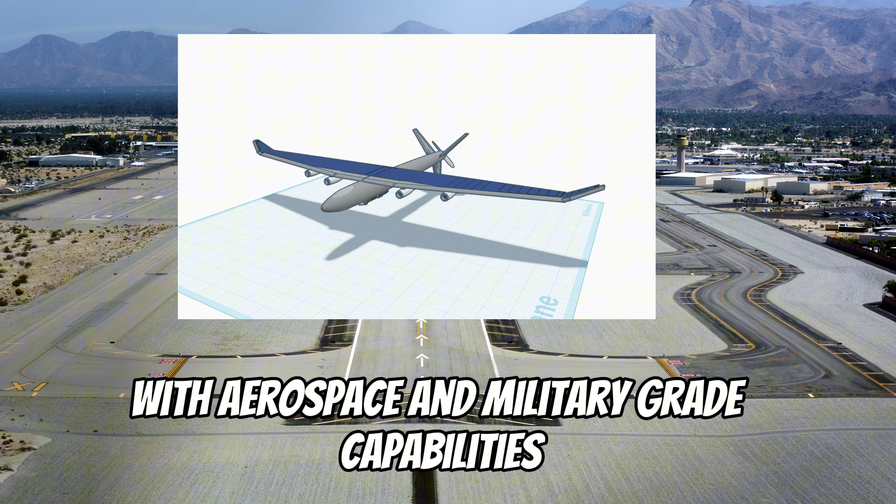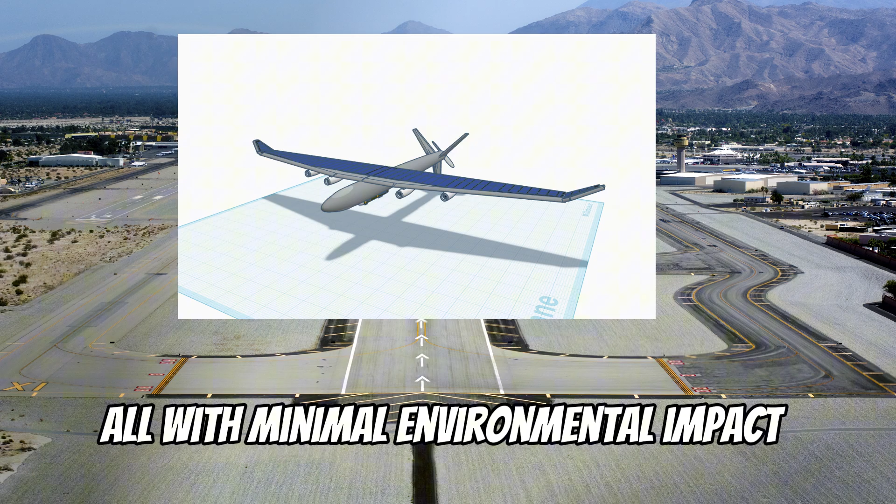It's a glider-style solar-powered UAV designed for long-endurance missions. Combining sustainable energy with aerospace and military-grade capabilities, this unmanned aircraft is built for tactical surveillance, remote operations, and environmental monitoring, all with minimal environmental impact. Let's take a deeper look.

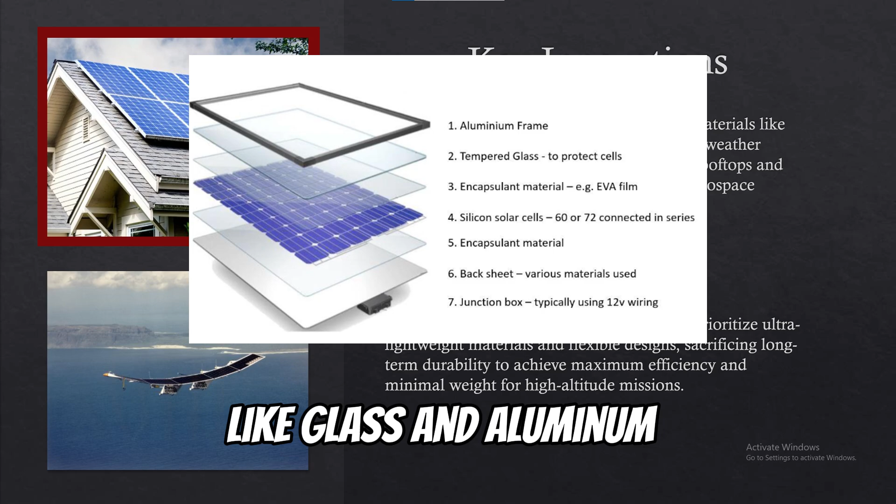Let's start with the key innovations that make our UAV flight-ready. When it comes to traditional solar panels, they rely on heavy, rigid materials like glass and aluminum to withstand years of weather exposure. While this is ideal for rooftops and other stationary setups, it poses a serious limitation for aircraft applications.

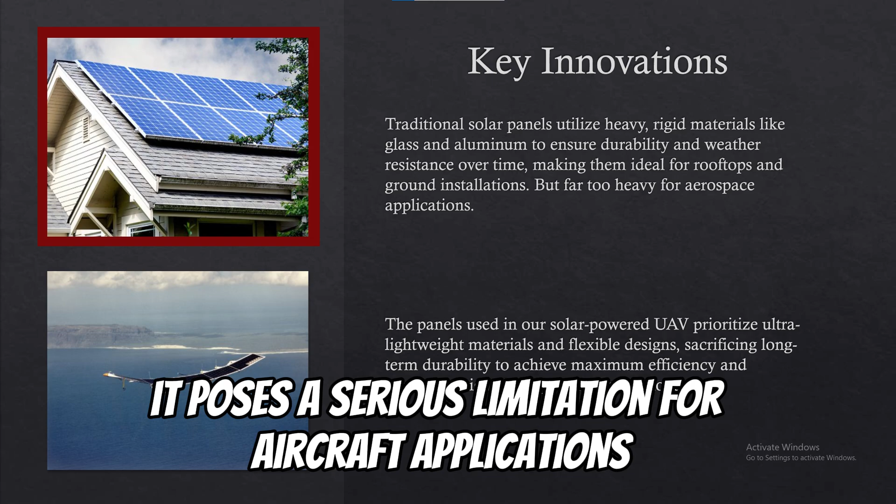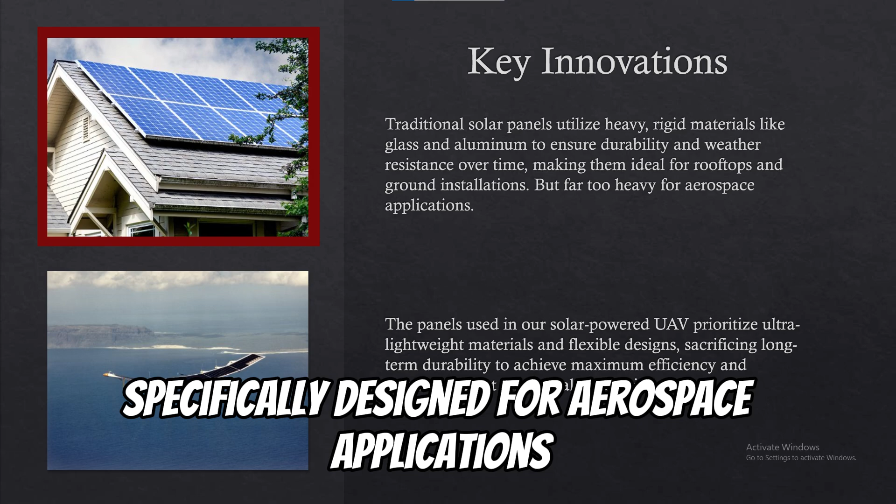In contrast, our UAV uses ultra-lightweight, flexible solar panels specifically designed for aerospace applications. By sacrificing some long-term durability, we gain significant weight savings and efficiency, which is critical for sustained high-altitude missions.

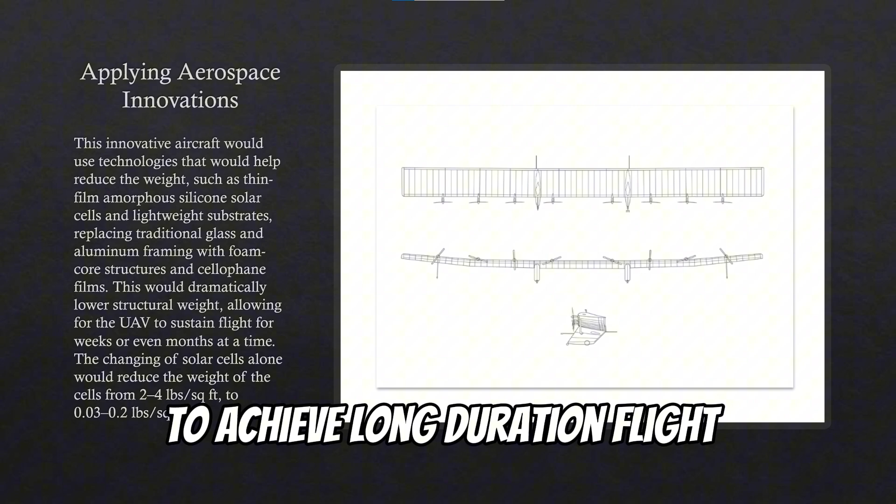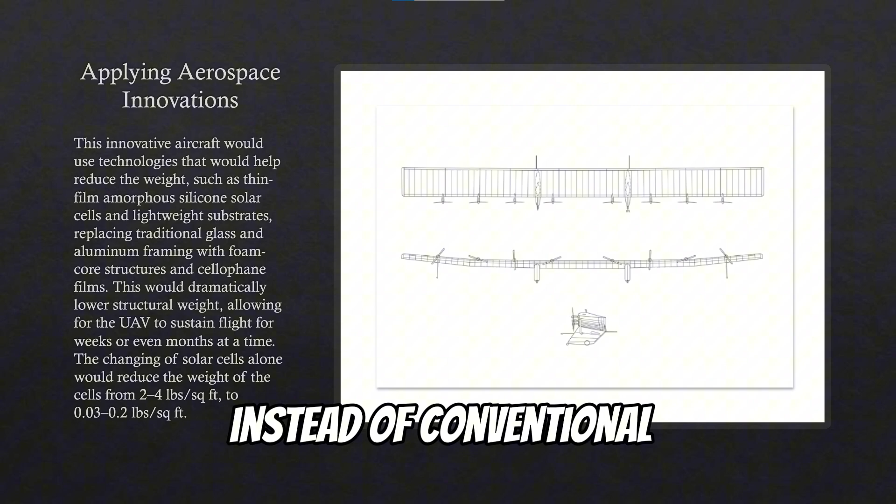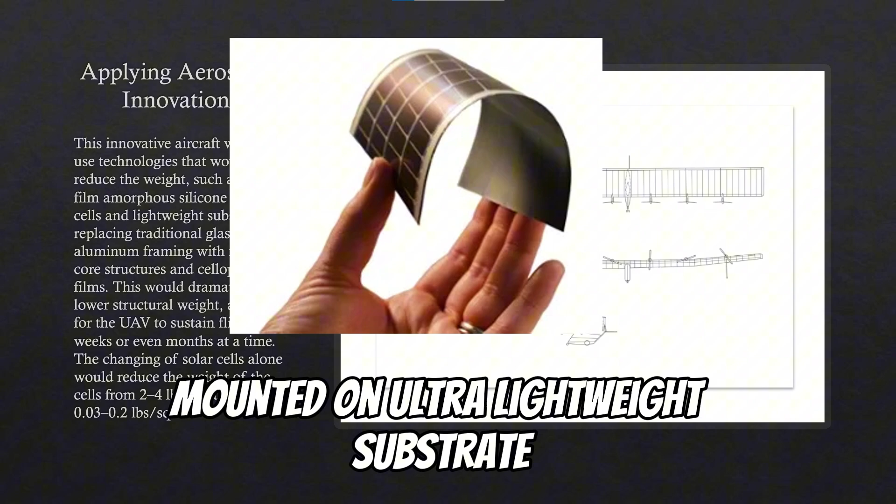To achieve long-duration flight, the Solar Sentinel integrates advanced aerospace materials and technologies specifically designed to reduce structural weight. Instead of conventional, heavier materials used in standard solar panels, our design utilizes thin amorphous silicon solar cells mounted on an ultra-lightweight substrate. These flexible cells drastically reduce weight while still maintaining sufficient energy output for sustained flight.

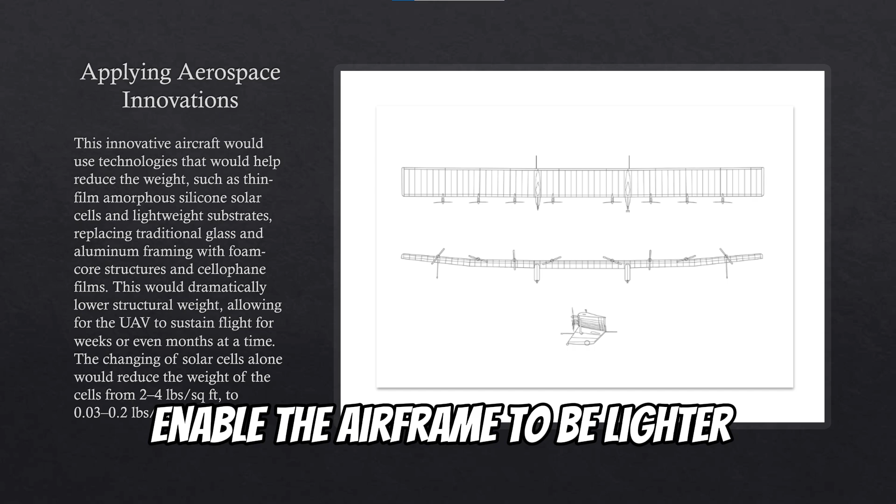We've replaced rigid panel framing with foam core structures and cellophane film layers, significantly cutting down mass without compromising aerodynamic stability. These material substitutions enable the airframe to be lighter, more adaptable to high-altitude conditions, and capable of housing a broader surface area for solar collection.

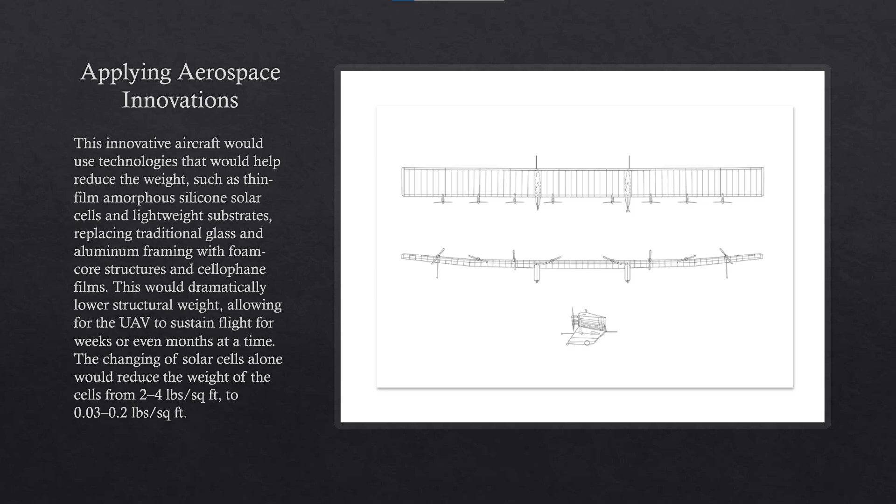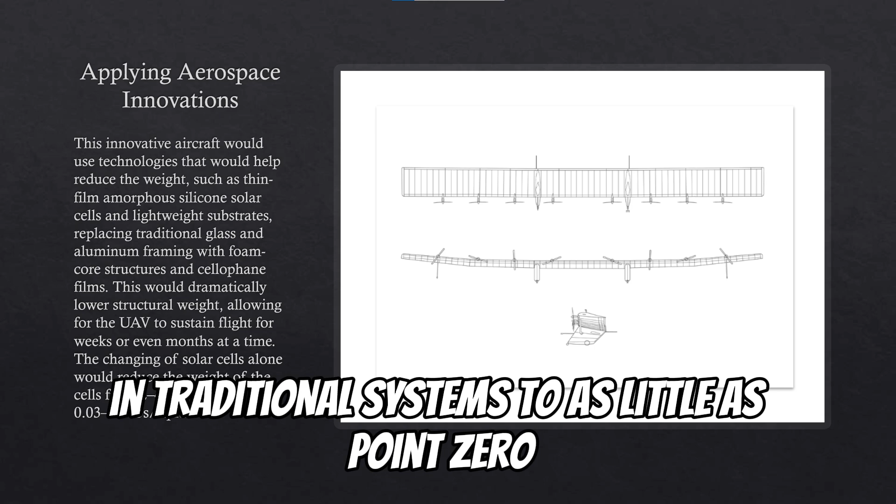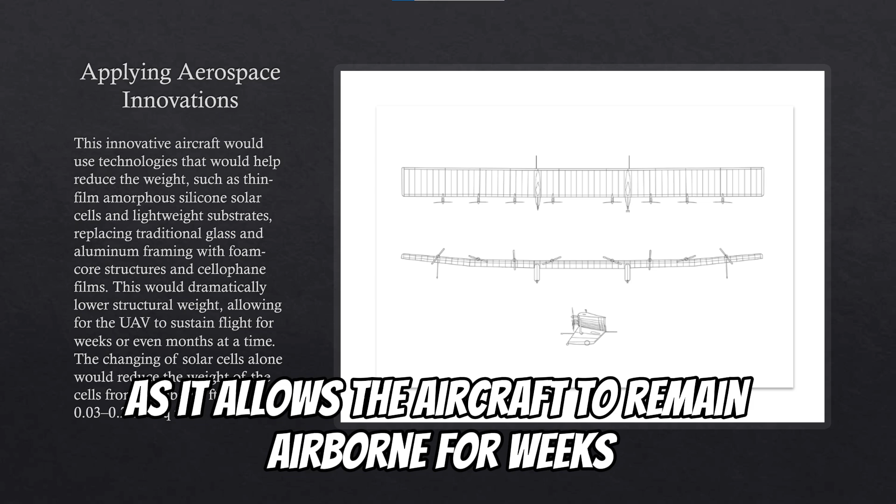This transition results in a massive reduction in solar cell weight, from approximately 2 to 4 pounds per square foot in traditional systems, to as little as 0.03 to 0.2 pounds per square foot in our UAV. These weight savings are critical, as it allows the aircraft to remain airborne for weeks or even months, powered entirely by the sun.

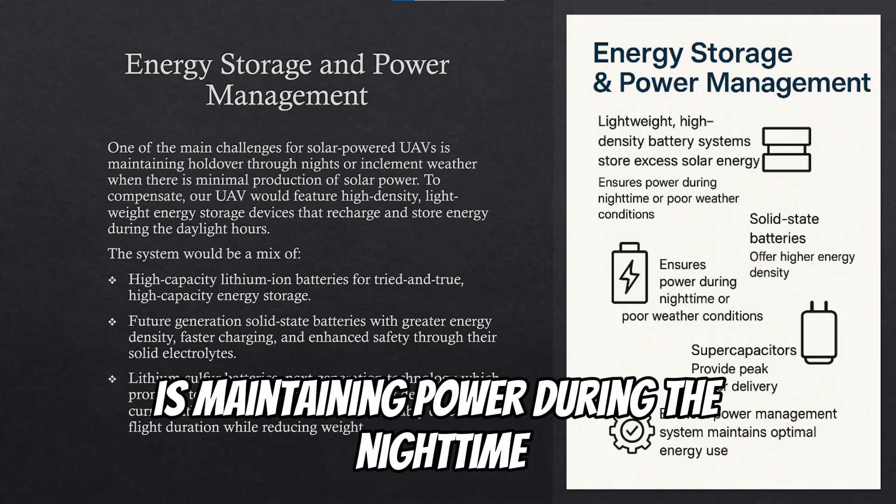One of the biggest challenges for solar-powered UAVs is maintaining power during the nighttime or poor weather when solar input is minimal. To overcome this, the Solar Sentinel uses a hybrid storage system that charges during daylight hours and supplies power when sunlight isn't available.

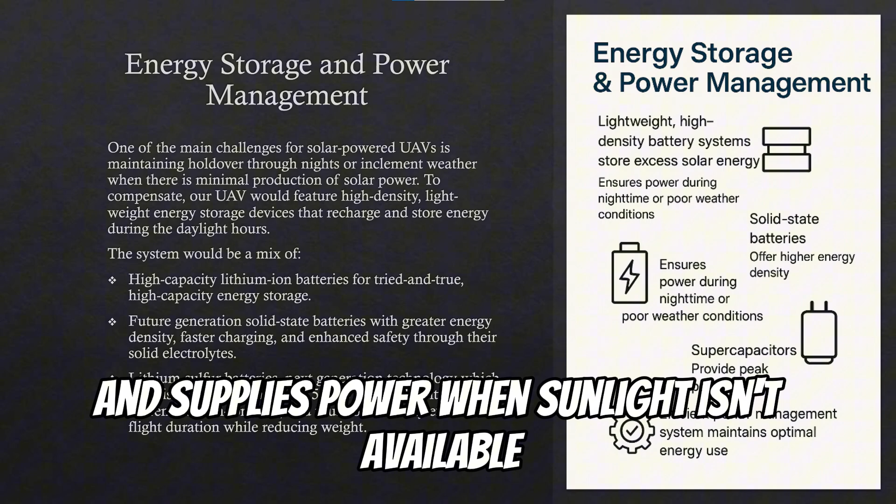The primary component is a set of high-capacity lithium-ion batteries, known for reliability and efficiency. We also account for emerging technologies like solid-state batteries, which offer higher energy density, faster charging, and improved safety. In the future, lithium-sulfur batteries could further enhance performance with up to 5 times the energy density of current lithium-ion cells, extending the flight time while further reducing weight.

One real-world example of solar-powered flight is the Skydweller, an uncrewed aerial system developed by Skydweller Aero. Powered by solar panels and onboard batteries, it can stay airborne for over 90 days without landing. It operates at altitudes up to 45,000 feet and carries up to 800 pounds of surveillance or communications equipment. With a 236-foot wingspan, it's a clear example of how solar technology is already enabling long-endurance, zero-emission flight.

Our aircraft being designed for high-endurance missions makes it ideal across both civilian and military sectors. Its ability to fly at extreme altitudes for long periods makes it perfect for environmental monitoring, wildlife tracking, and climate observation. On the defense side, it can support persistent surveillance, secure communications, and with the right payload, precision missile strikes in high-risk or remote areas. This combination of endurance, versatility, and low detectability makes it a valuable asset for modern aerial operations.

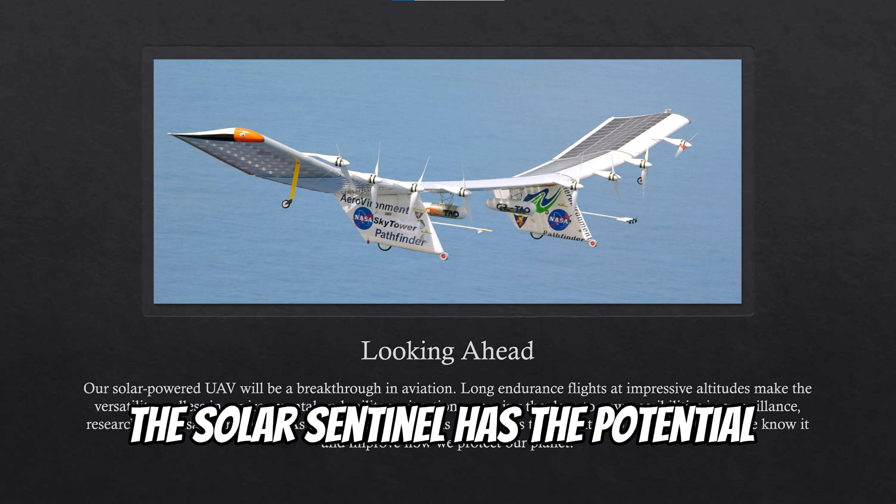The Solar Sentinel represents a major step forward in the future of aviation. Its ability to perform long-endurance missions at high altitudes opens the door to new capabilities in both environmental and military operations, from surveillance and research to communications and disaster response. As solar and battery technologies continue to advance, aircraft like this will play a growing role in sustainable aviation. With its innovative design, the Solar Sentinel has the potential to redefine how we explore, observe, and protect the world around us.

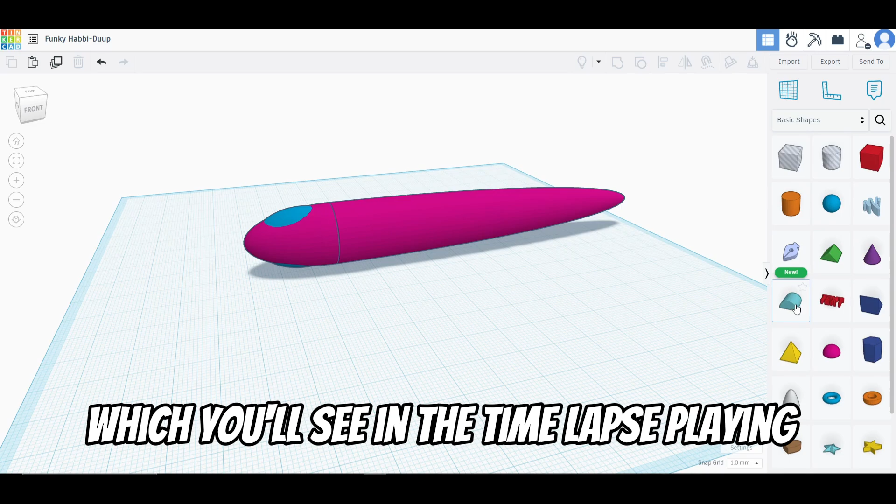Hi everyone, I'm Alfredo, and for our team's solar-powered UAV project, also known as the Solar Sentinel, my main role was creating the CAD design, which you'll see in the time-lapse playing alongside my explanation. Let me walk you through the design process and the key features we focused on for our UAV.

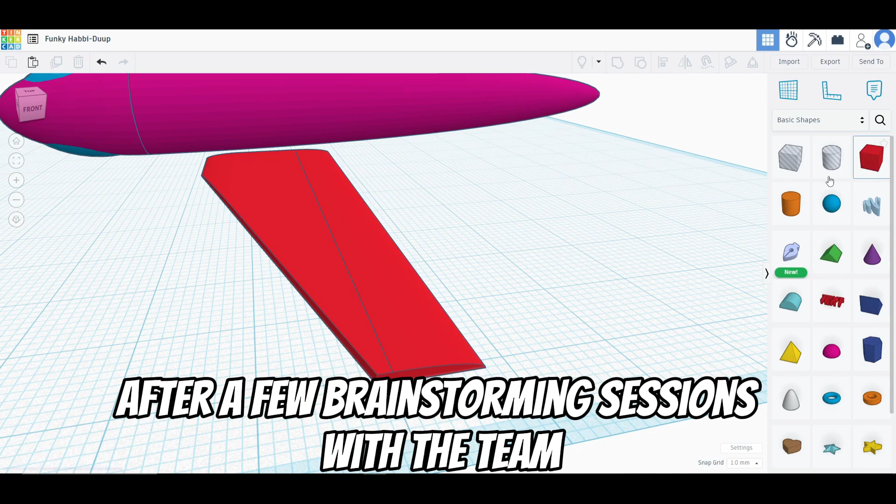Our goal was to create a lightweight, efficient, and sustainable UAV that could stay airborne for long durations using solar energy. After a few brainstorming sessions with the team, we agreed on a fixed wing design with a high aspect ratio. That means long, narrow wings, which is ideal for maximizing lift and minimizing drag. That feature is especially important in solar UAVs where efficiency is everything.

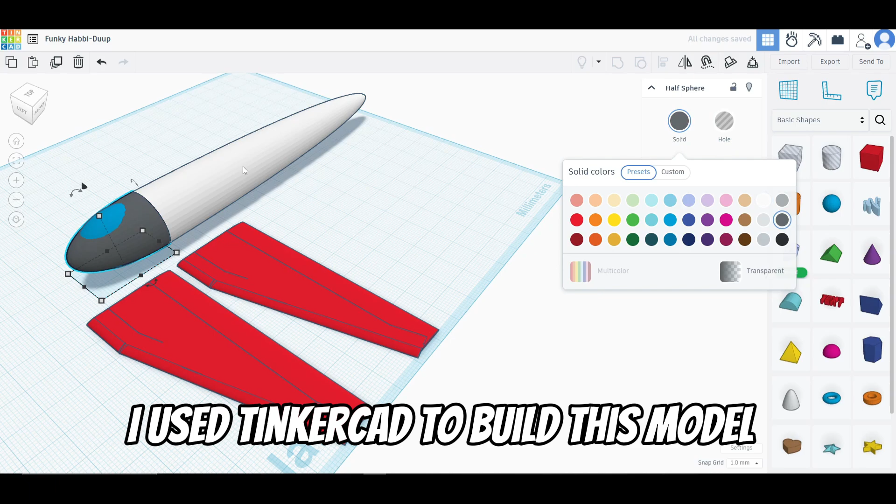Due to our available resources, I used Tinkercad to build this model. While Tinkercad is more basic compared to professional CAD software like Fusion 360 or SolidWorks, I still managed to create a decent model by breaking the UAV into modular components. The time-lapse you're watching compresses several hours of modeling work into just a few minutes. It shows the iterative nature of the process.

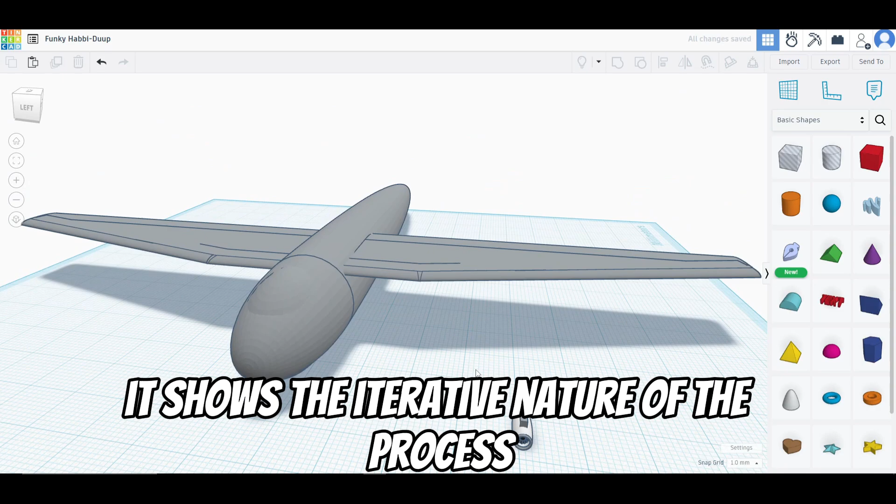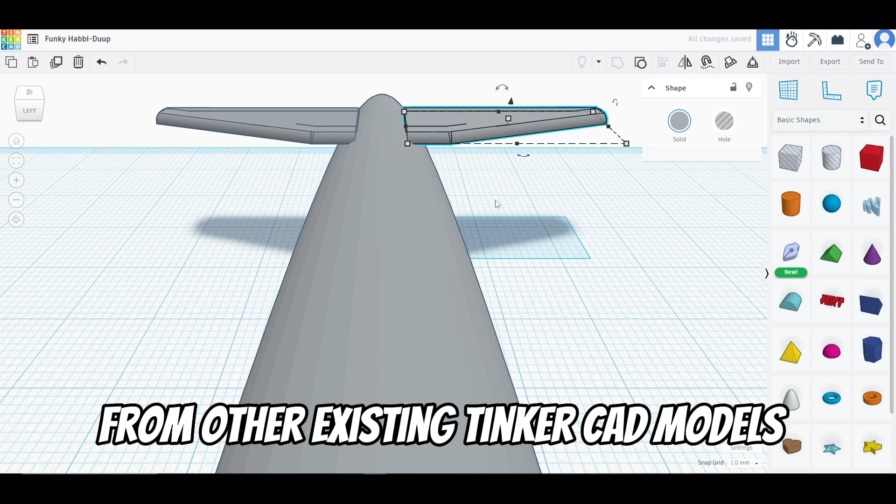There were times I completely scrapped and restarted the design, or adjusted the wing angle for better realism. I had to really think about the proportions and scale, and make sure everything would make sense for a UAV of this size. I also added a few items that I borrowed from other existing Tinkercad models. This part of the project really showed how the design and engineering come together. While this CAD model is purely visual, I tried my best to base every choice on real-world engineering principles.

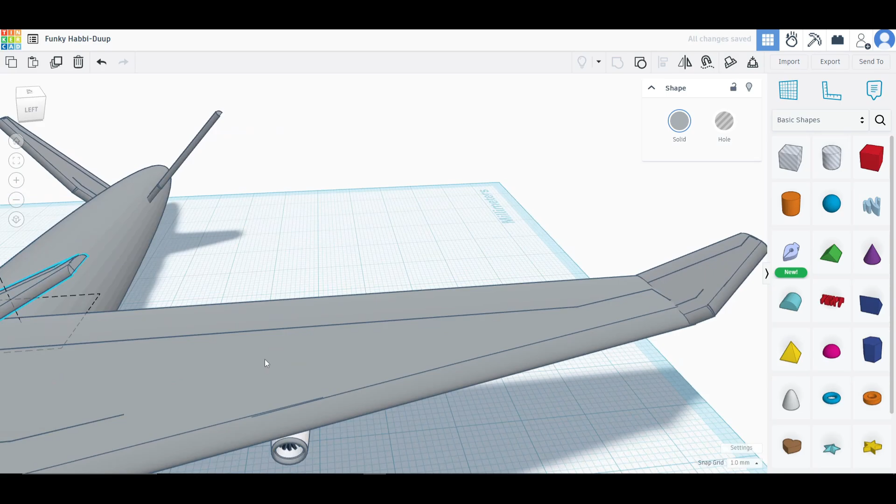Obviously, some details like material weight, electronics, and internal structure aren't shown in full detail, but I still kept those ideas in mind throughout the process. There were several design considerations that we did agree on as a team that I implemented as best as I could. Some of the most important ones I included were wingspan and solar panel integration.

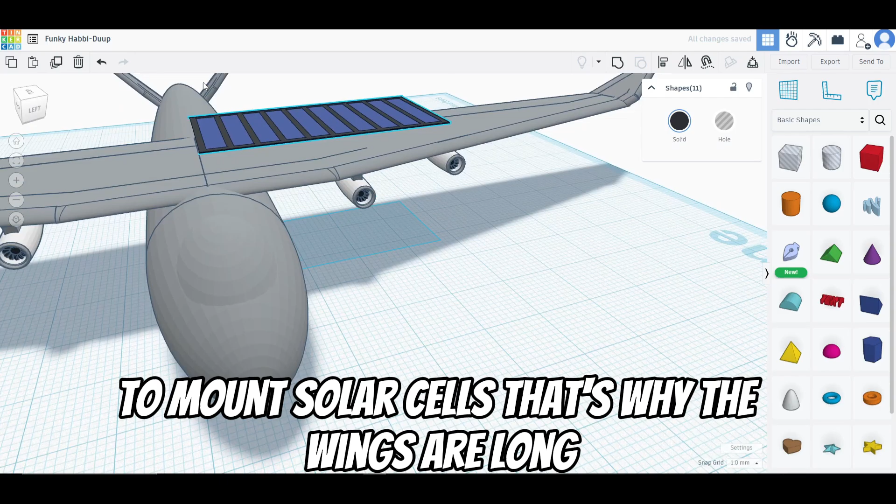We wanted to give our UAV as much surface area as possible to mount solar cells. That's why the wings are long, thin, and flat on top, the ideal configuration for catching sunlight throughout the day. I designed the top of the wings to act almost like a solar panel bed.

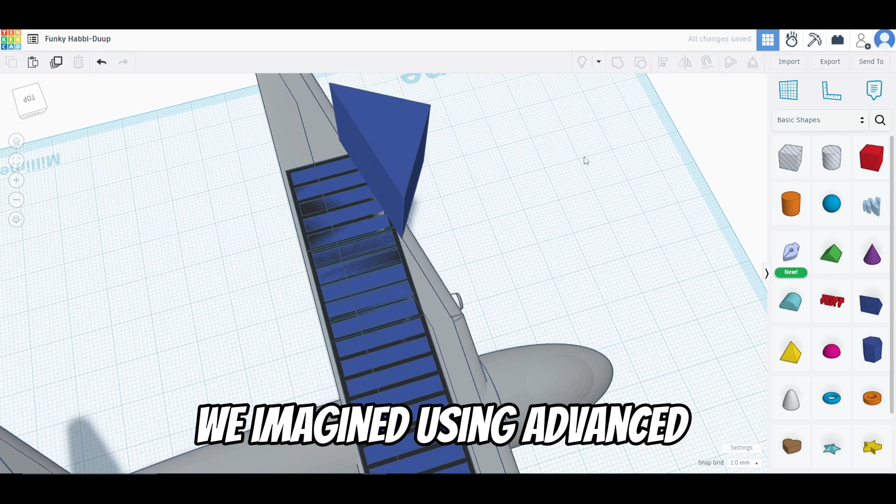Another one was material selection and structure. While I couldn't model materials in Tinkercad directly, we imagined using advanced lightweight composites like carbon fiber or reinforced polymers. These would offer strength while keeping the UAV light, which is critical for solar-powered flight.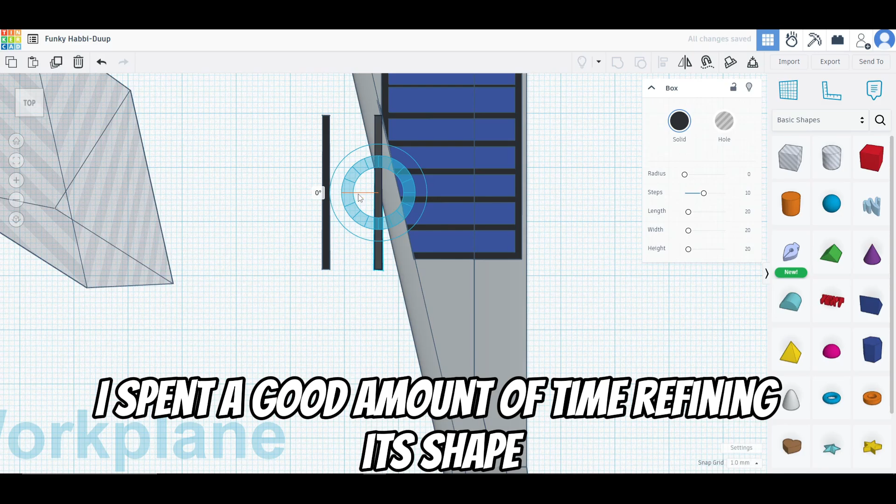Another one we considered was aerodynamics. It was designed to be sleek and narrow to reduce drag. I spent a good amount of time refining its shape, starting with a more chunky design at first, then eventually making it smaller to create better airflow, as you could also see later on in the time-lapse. The tail assembly was kept minimal but functional for directional stability.

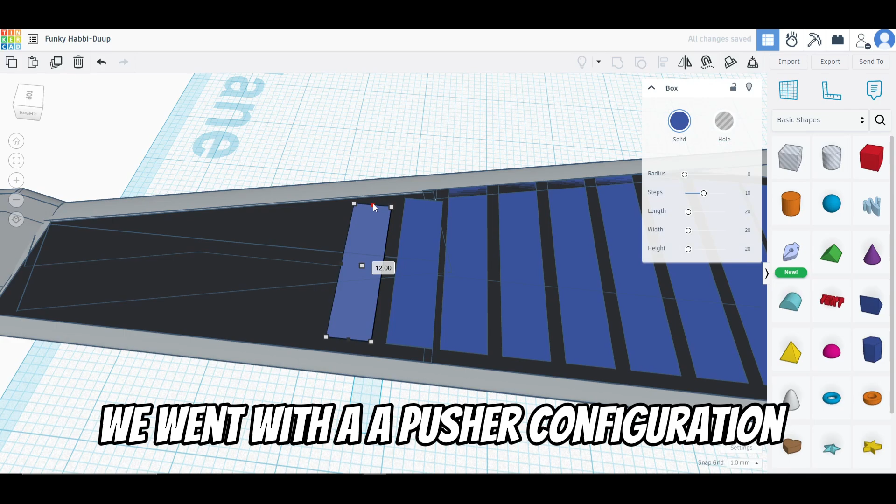Another feature I want to mention is the rear propeller setup. We went with a pusher configuration, meaning the propeller is at the back, to keep the airflow clean over the wings and improve efficiency. It's a small detail, but it has a real effect on performance.

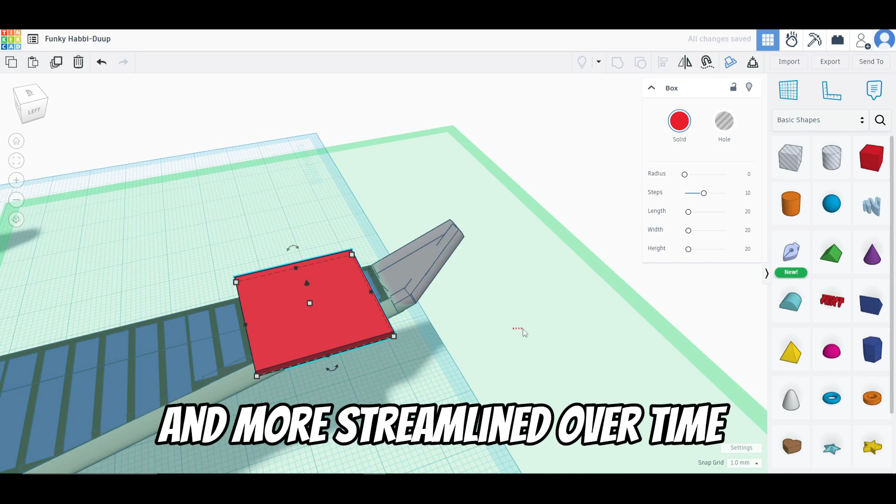And as you can probably tell, the overall shape of the plane became thinner and more streamlined over time. That wasn't just for the looks, it was an intentional design to support our goals of efficiency and endurance. One of the real-world inspirations we looked at during our project was the Skydweller Aero, a solar-powered aircraft that's currently being developed for ultra-long endurance flight.

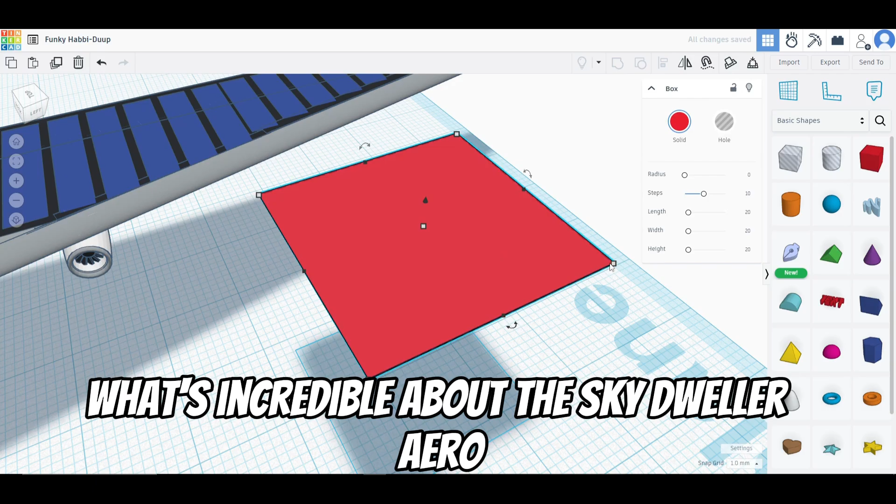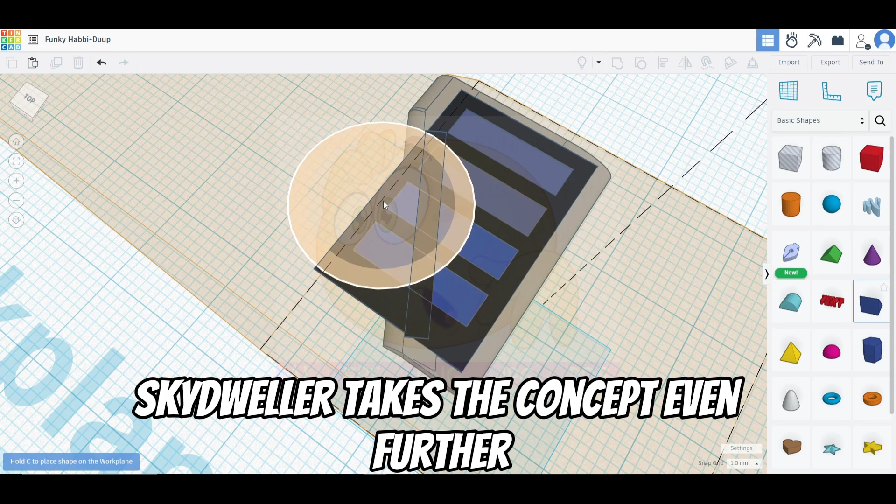What's incredible about the Skydweller Aero is that it's designed to fly for months at a time without landing, completely powered by the sun. It was originally based on a record-breaking plane called the Solar Impulse 2, which flew around the world using only solar energy. Skydweller takes the concept even further by adding full autonomy, which means no pilot is needed.

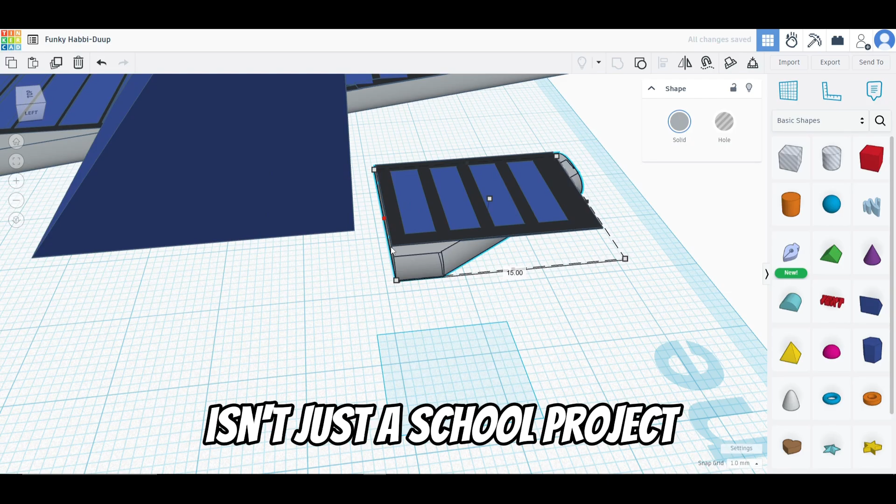It's being developed for missions like surveillance, communications relay, and environmental monitoring, exactly the kinds of things we imagine for our UAV. Seeing what companies like Skydweller are doing really showed us that our concept isn't just a school project. It's actually aligned with real cutting-edge aerospace innovation.

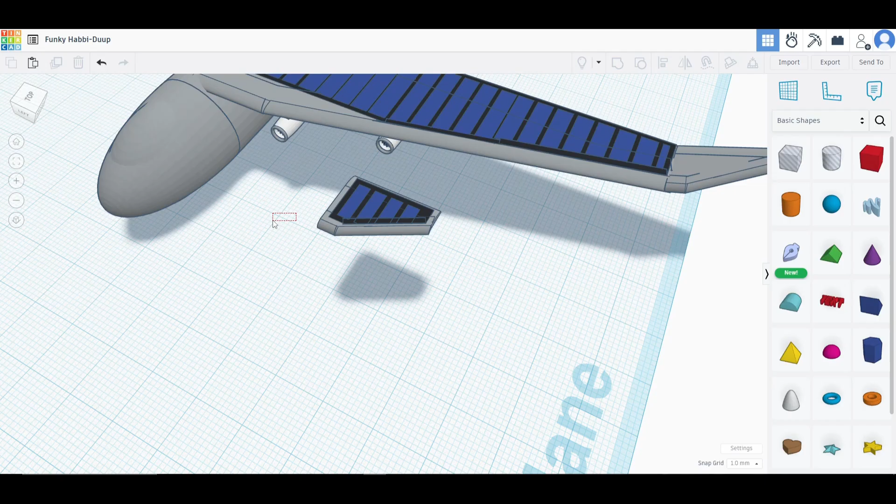It made our design feel more meaningful and also gave us ideas for future improvements like autonomous navigation systems or energy storage solutions. In conclusion, the CAD model helped our team visualize and refine our concept. It serves as a foundation for future steps like simulation, prototyping, or even a real scale model. By combining renewable energy with UAV technology, we believe this design could be a step toward more sustainable aerospace solutions.

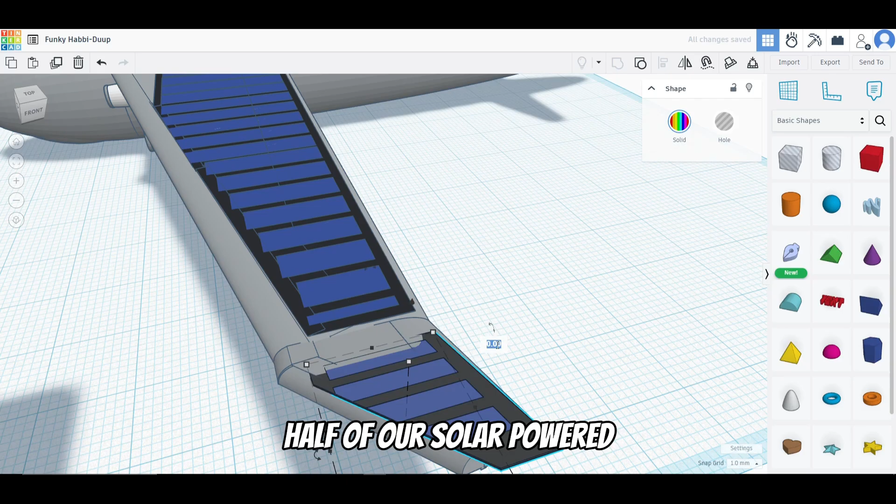Thank you. Hey everyone, I'm Chris, and I'll be walking you through the second half of our solar powered UAV design time lapse. At this stage of the project, the major components were already in place, so the focus shifted towards refining the design, exploring new ideas, and making the model feel more complete and functional.

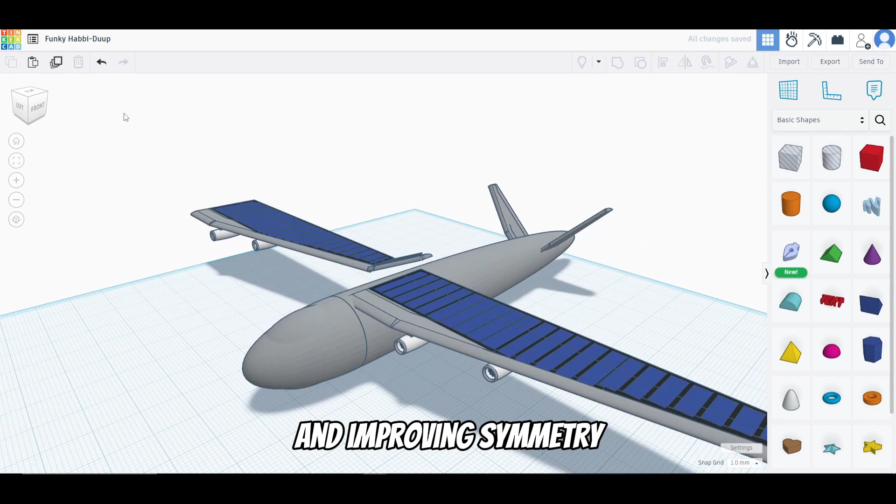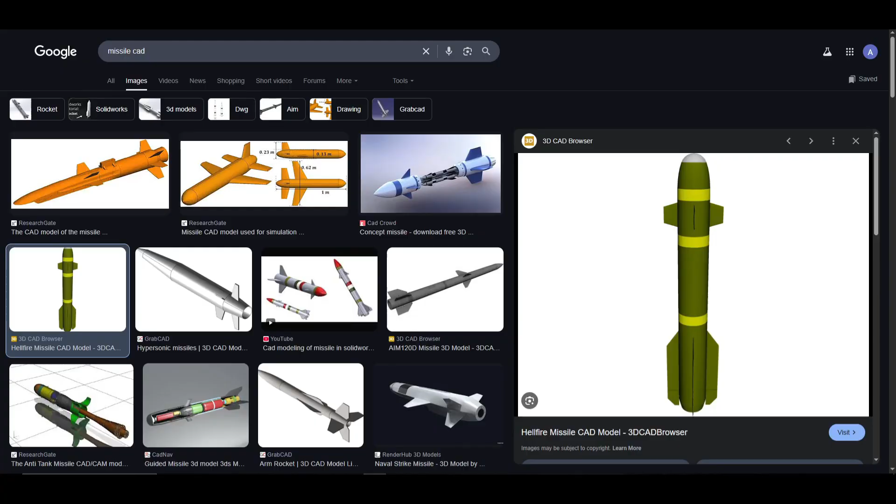We began with some detailed adjustments to the wings. This meant revisiting the wing shape, fine tuning the angle and surface area, and improving symmetry. While the changes might seem small, they were essential, especially when considering the integration of solar panels. By making the wings flatter on top and more uniform overall, we gave ourselves a much better surface to work with for more energy collection. These kinds of subtle edits really add up in the bigger picture for efficiency and flight stability.

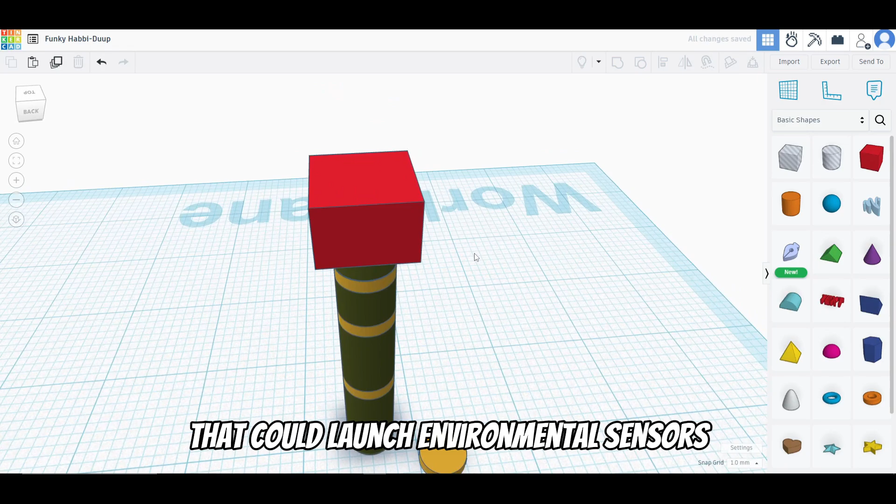After the wings were in a good place, we shifted focus to a completely new element, designing a rocket model to attach under the UAV. This was one of the most exciting additions to the build. The idea behind it was to give the UAV modular capabilities, allowing it to carry and deploy specialized payloads. Think of it as a flying platform that could launch environmental sensors, small research probes, or even emergency communication devices in remote areas.

Or we could just use it to blow up Elon Musk's house or something.

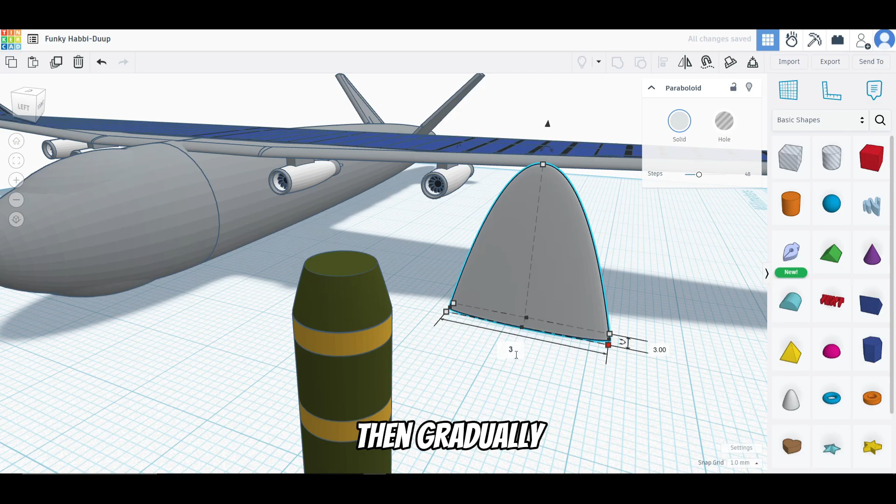But we started out by sketching out the basic rocket body using simple geometric shapes, then gradually layered in details to give it a more realistic look, things like fins, a tapered nose, and a cylindrical engine section. Even though we were using Tinkercad, which is more limited than other CAD software, we tried to make the model as true to form as possible. It had to look compact enough to fit under the fuselage, but detailed enough to feel like a legit functional component.

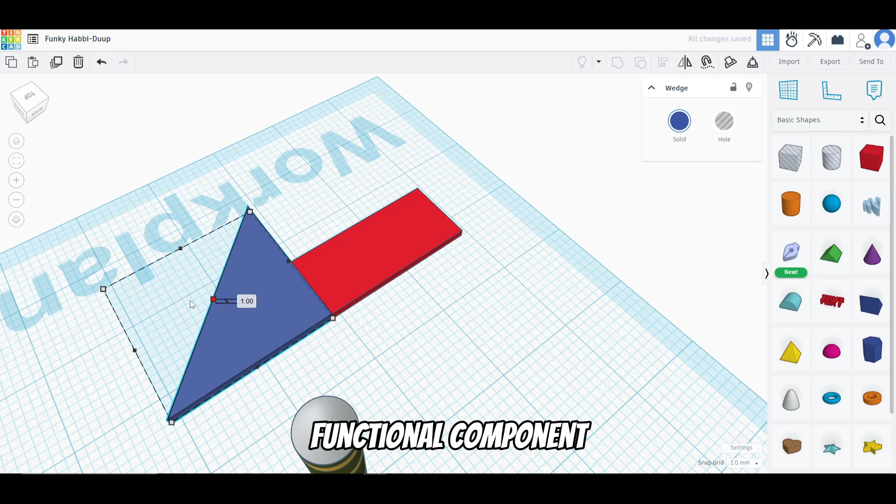We imagined scenarios where this rocket could be remotely released mid flight or during a stationary hover, delivering scientific tools to hard to reach locations, maybe even on a future version of this UAV. That kind of flexibility is what makes solar UAVs especially promising for long range missions, especially when paired with low energy payloads like this.

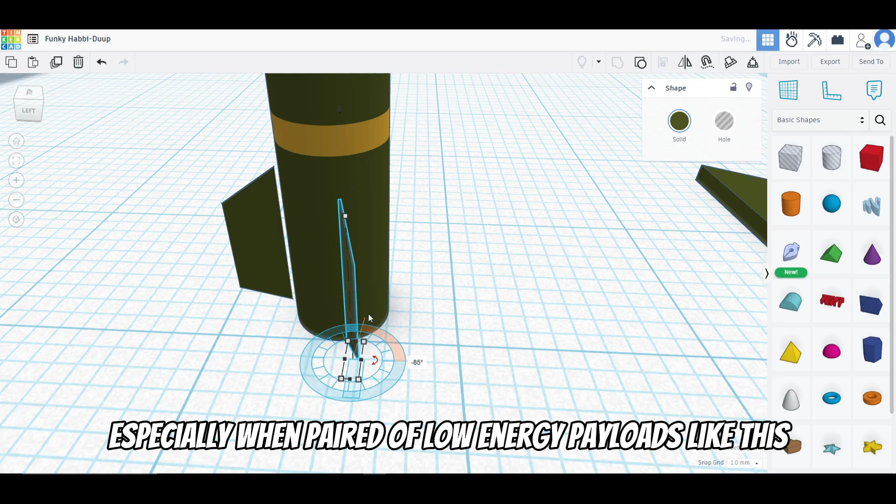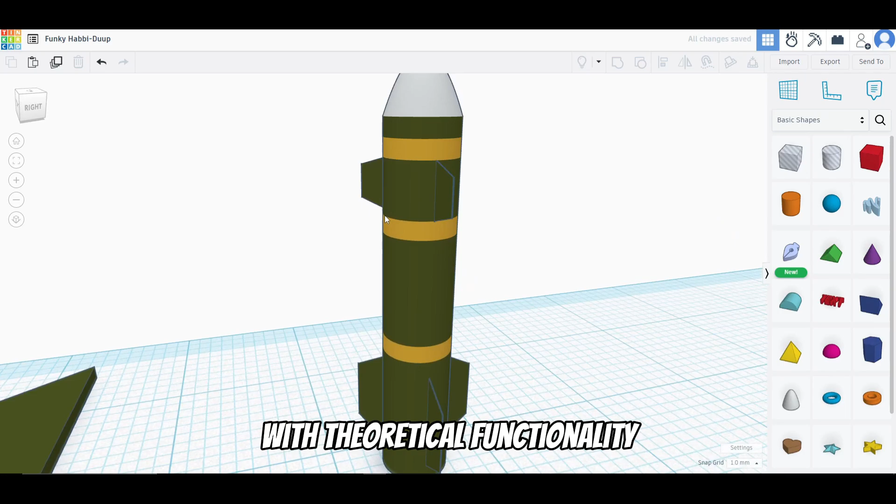It also got us thinking about mission planning. Where would this rocket mount be located? Would it be a one-time deployable piece or part of a reconfigurable pod system? Even in a visual model like this, these questions shaped how we placed and proportioned the attachment. So we tried to balance the visual realism with theoretical functionality, making sure the rocket didn't interfere with aerodynamics or the plane's center of gravity.

This section of the build not only brought in a cool design element, but really pushed us to think creatively about multi-mission platforms, the kinds of systems that can adapt to different tasks, whether that's scientific exploration, remote sensing, or even disaster relief.

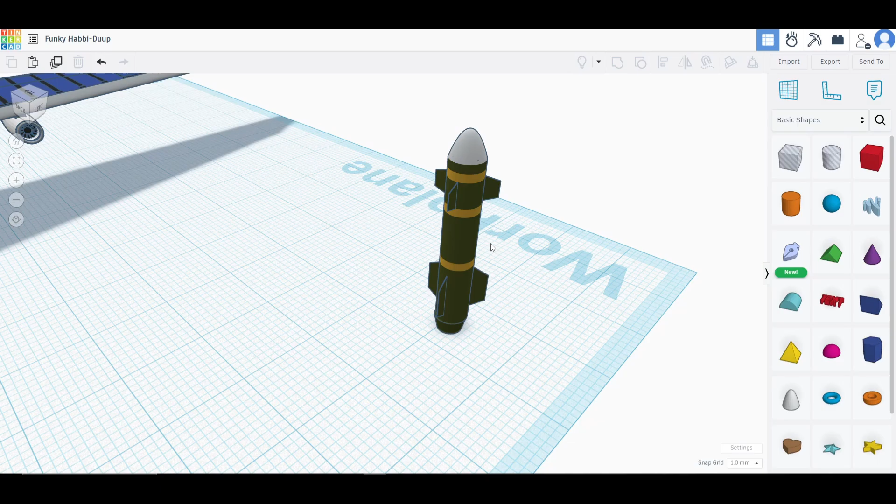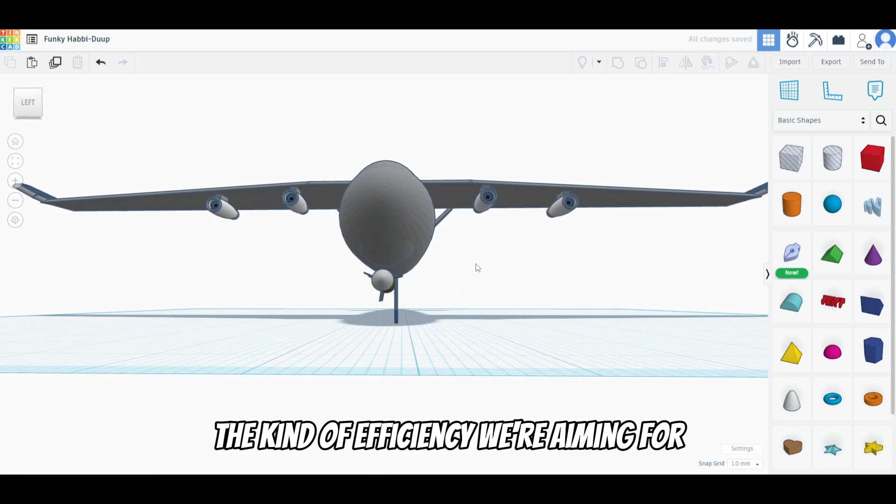Once the rocket model was complete, it was time to revisit the main body of the aircraft. One of our priorities was to make the fuselage more aerodynamic. So we worked on narrowing the central structure and reshaping the nose to reduce drag. This not only helped make the UAV look more streamlined, but also reflected the kind of efficiency we're aiming for in a solar-powered platform. A sleeker body means better airflow, and better airflow means more range and stability during flight, especially on long endurance missions.

These edits required a lot of careful adjustments. It's easy to get caught up in small details. Keeping an eye on overall proportions really helped everything feel balanced and intentional.

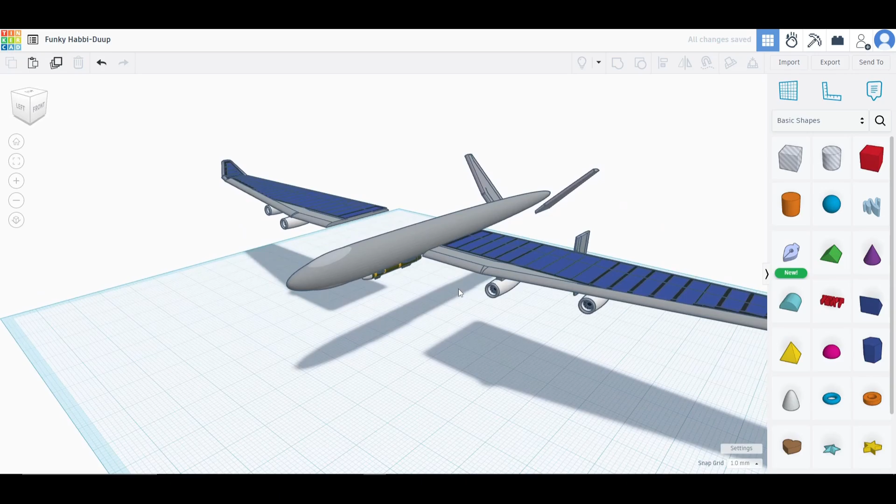Towards the end of the time lapse, we focused on finalizing the rear section of the UAV. This included modeling the tail fins and vertical stabilizer, essential components for maintaining directional control. We also added the rear-mounted propeller, which is part of what's known as a pusher configuration. This layout helps improve the airflow over the wings and reduce turbulence around the main body.

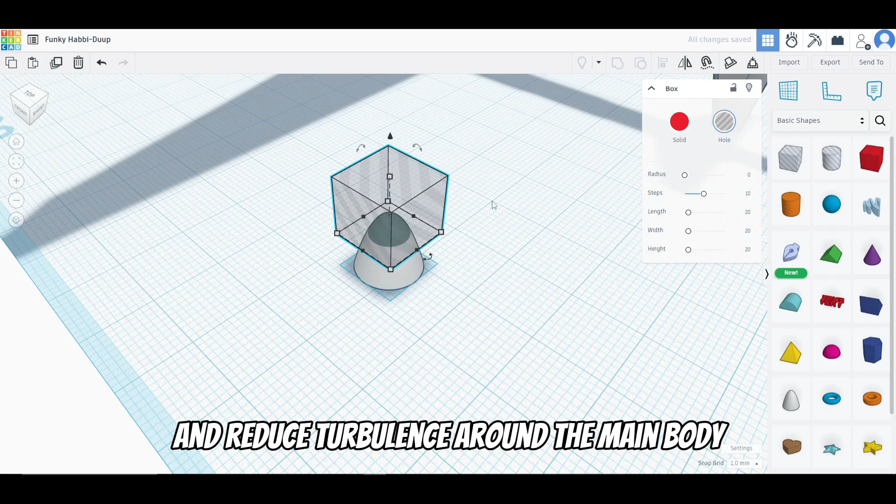Getting the positioning and scale right for these rear components was surprisingly tricky. We had to make sure they looked functional while still fitting with the aesthetic and engineering intent of the design. The rear end might not get as much attention as the wings or nose, but it's just as important for overall flight performance.

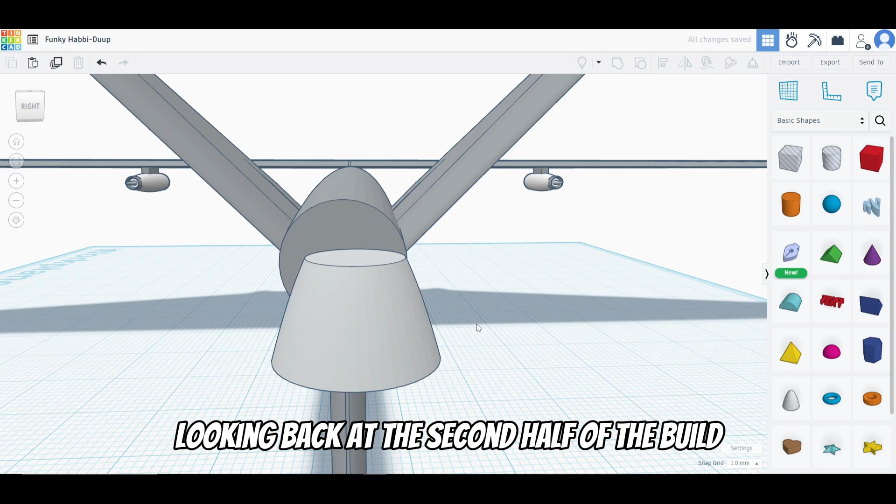Looking back at the second half of the build, it really highlights how important iteration and detail are in the design process. Every adjustment, from the curve of the wing to the position of the propeller, is a small step towards making the concept more believable and potentially real.

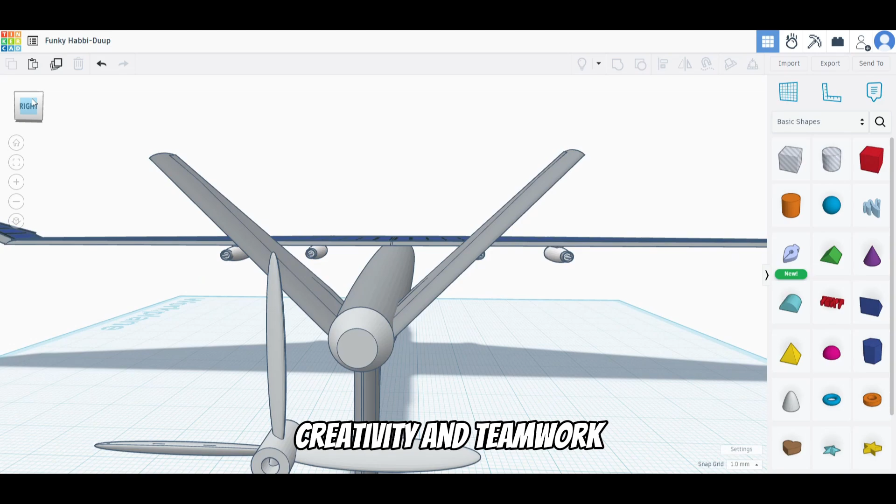This time lapse is more than just a sped-up version of our CAD work. It's a visual representation of problem solving, creativity, and teamwork. And while this model isn't flight ready just yet, it gives us a strong foundation to build from, whether in simulations, physical prototypes, or future design revisions.

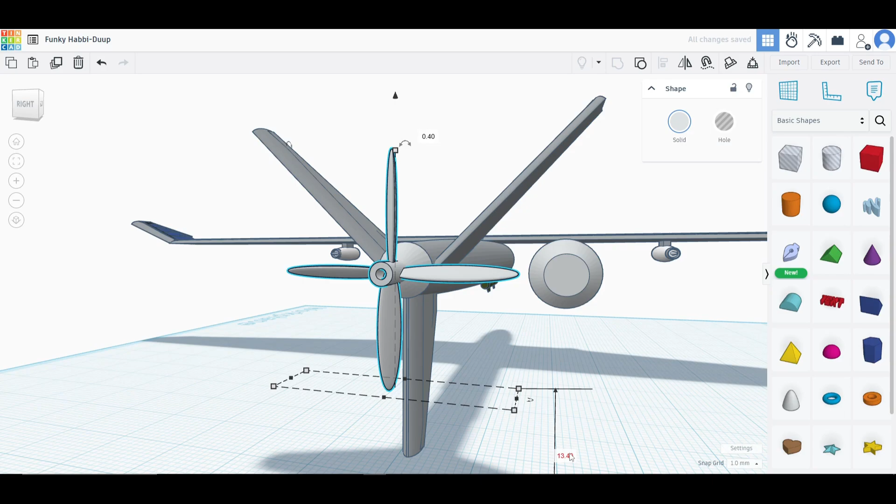Thanks so much for watching. We hope our project sparks ideas and shows what's possible when you combine sustainability with aerospace design. We're excited to keep pushing forward, and we can't wait to see what comes next.

Before the clips begin, I'd like to mention a disclaimer. Please know that the following clips containing planes and drones are just used as a reference, and they are not our solar panel UAV, as you will see big aircraft, pilots, and drones in the following clips.

The Solis Sentinel is an aircraft that was made mainly for military purposes. Now to mention the major details and abilities that make the Solis Sentinel a great innovation. Firstly, the solar power technology. At the heart of the Solis Sentinel is its cutting-edge solar power system. Equipped with high-efficiency photovoltaic cells, it can harness solar energy even at high altitudes, like being above the clouds, which benefits us and the military as no one will see it coming. This allows for extended flight durations without the need for refueling, ensuring continuous operations during critical missions.